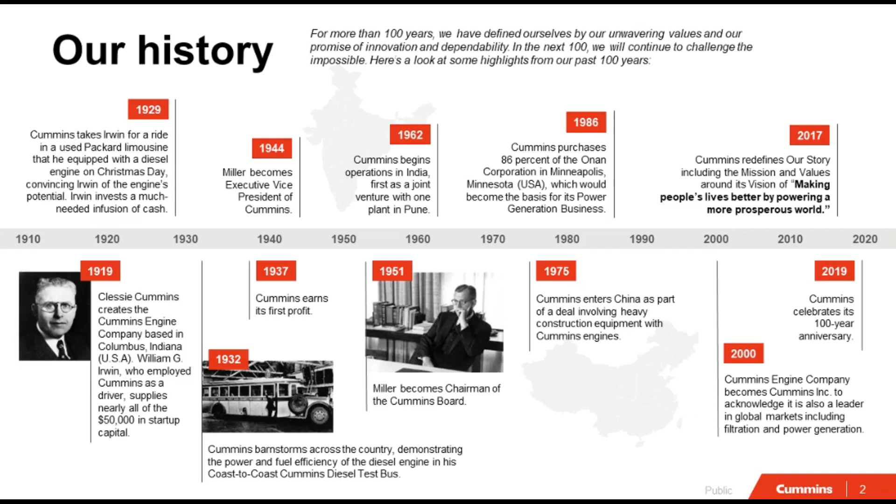We're on track to exceed this number in 2023 in terms of investment. There's a little bit of, I'll say, tension around that number in that some of our investors would say we would rather have the money in dividend, but we think this is the right investment for the future. We're really at a critical time in technology changes over the next 5 to 10 years. We want to be set up for the future, so we want to have that investment now so that we can offer those products in the future.

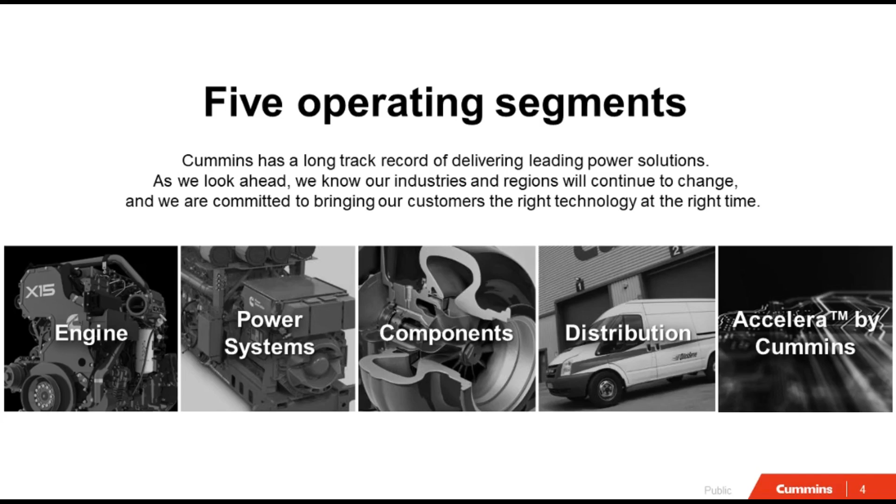All right, so Cummins is structured into 5 operating segments. So the traditional business, which is our engine business, power systems. These are backup generators, locomotives, prime power, those kinds of things. And just to give you a sense of the range that Cummins covers, the smallest engine that we build is 2.8 liters, the largest engine we build is 95 liters, and everything in between. For transportation related, it's 6.7 liter to 15 liter. That's the range that we cover, but Cummins covers a lot of power applications that may not be obvious at the surface.

We also have a components business, so turbochargers. We acquired some brake applications, so we're now at vehicle component level, and Cummins is in this interesting space where not only are we selling power products on our own, branded as Cummins, we're also selling components to our competitors. So you could see a Cummins turbocharger on a Caterpillar engine, which feels a little bit weird sometimes, but we cover all that. And then our distribution business, which is basically service and support.

And then Tim touched on our Accelera business, which is really our electrified product platforms. It used to be called New Power within Cummins. That seemed like a not very creative name in my opinion, so we rebranded it 6-8 months ago now. So if you hear about Accelera products, it's Cummins. It's not a standalone, it's actually within the core business.

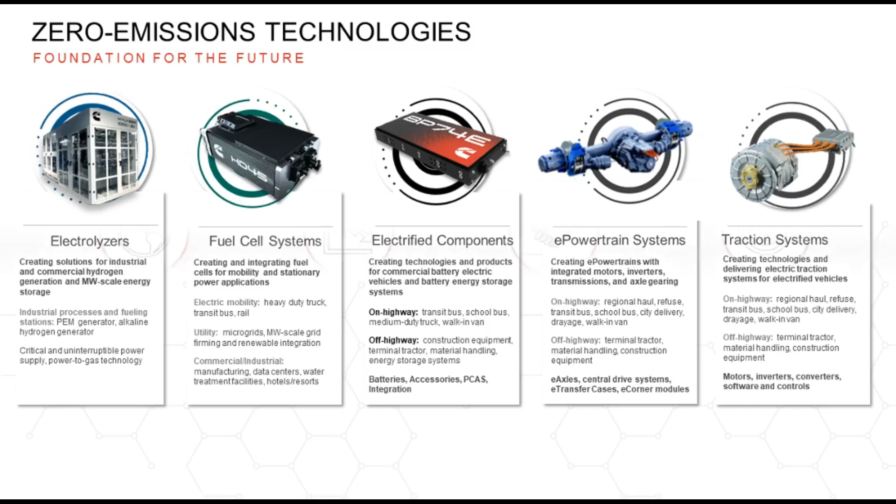Internally we talk about this journey as our Destination Zero. And that doesn't necessarily mean that we're going to move everything to zero emissions. It means that we're going to look at how do we lower emissions today.

One example of that is if we can make a 1% improvement in fuel economy on our diesel product, and we sell 100,000 of those in a year, that adds up to be a really big number, right? So there's power in scale.

We also look at what are the options to reduce well to wheel. I didn't get to hear everything this morning, but when I came in there was some discussion about CARB and the rules and how they're looking at things. And they're only looking at tank to wheel, right — the fuel tank, or the tank to tailpipe, really.

And we think that's not really the right way to look at it. We think there are fuels out there, especially if you're looking at carbon, where you can reduce your carbon impact substantially by incorporating renewable diesel or renewable natural gas or those other renewables that are getting generated, especially on the natural gas side, through normal life processes. You're going to get natural gas off of landfills, off of wastewater treatment — all these things are going to make natural gas. Why not use those for productive purposes in transportation?

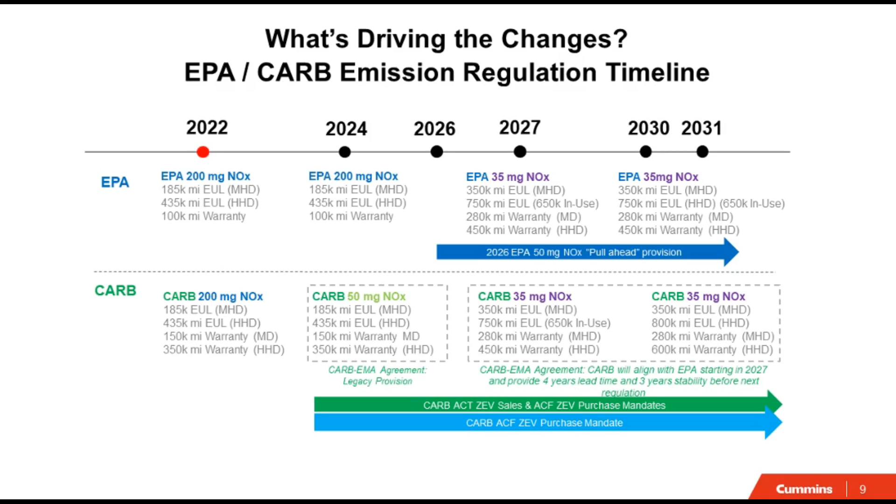There's also the Advanced Clean Truck Rule, which requires sellers of heavy-duty equipment to sell a certain percentage of electric. And on the fleet side, there's the Advanced Clean Fleet, which requires a certain percentage of purchases to be electric starting in 2024. And if that wasn't enough, we've also got the Clean Truck Check Program, basically a smog check for trucks, that starts next year.

So there's a lot going on, and a lot of these crossover. Omnibus impacts what we as powertrain providers can offer to the market. Advanced Clean Truck Rule impacts how many combustion products we can offer. And if there aren't enough electric sold, they can't sell enough combustion. Folks that are trying to get goods and services moved get pretty upset pretty quickly.

So I'll give you some side advice: as much as it feels like CARB doesn't listen, keep bringing those real issues to them, because eventually they'll have to deal with the reality that you guys are facing. And I know it's painful. I know it's painful.

Here's how we think about adopting new technology. First and foremost, can the technology get the job done that you need? If it doesn't serve the need, or you have to have 2 or 3 vehicles to do the same job, that doesn't make sense. So at Cummins we're trying to provide solutions where the technology makes sense for your operation, versus force-fitting technology we want to sell. We figure if we offer it all, we don't care which one you choose, as long as the powertrain's painted red. Does it make sense economically?

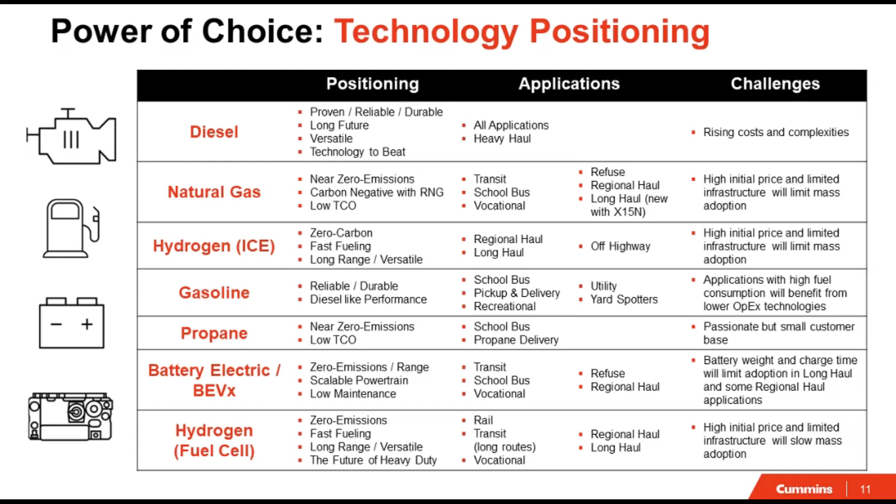At Cummins, we still think diesel engines have got life left in them, and we're investing in bringing the next generation diesel engine. I've got a really cool graphic and a couple of slides I'll show you. We call it our fuel agnostic platform. It'll be fueled by diesel, natural gas, hydrogen, gasoline, or propane - not interchangeably, the engines are slightly different, but the base platform is the same. That's how we're going to bring to market a lower cost, by having the same base platform and making the adjustments to components necessary for the fuel.

We're also invested in battery electric. The electric transit bus has our powertrain in it, the Blue Bird school bus has our powertrain in it. BEVX, which I think is a horrible acronym, internally we call it BEVX - it's hybrids, pick your fuel for the engine part, but it's a hybrid technology. And then fuel cells - we're engaged in fuel cell development, we have trucks deployed and we're learning every day. We think there's a lot of synergy between making fuel cells successful and introducing hydrogen combustion early, because if we can get the volume of fuel up, we think the price can come down significantly.

Is anybody running hydrogen today? No? So hydrogen right now is roughly 25 bucks a kilogram. Back to that TCO, that doesn't make sense. So we're thinking, how do you get that up - or I mean, to get the price down, you've got to get the volume up. You've got to get those fueling stations running and reliable for it to make sense.

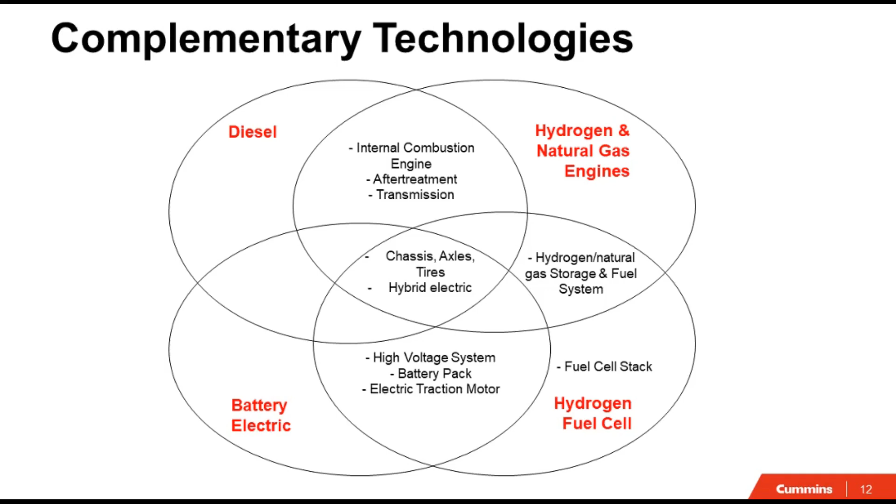You can replace the fuels, but that's where the hybrid technology comes in. So all of these really are complementary and not competing against each other. And we get into this debate about, well, who's going to win?

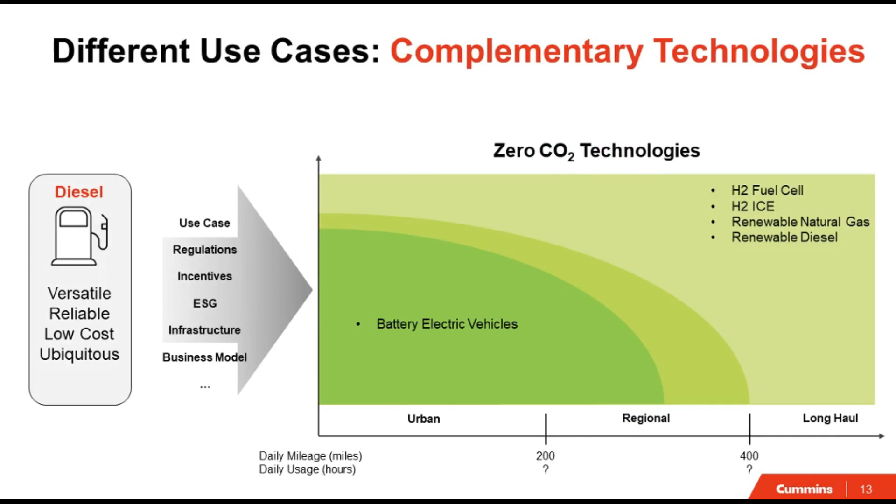We don't see it as which one's going to win. It's which one is the right one for your application. That's how we think about it.

And that application is probably influenced by a number of things, right? Regulations and incentives. Some companies and agencies have environmental sustainability goals. Can you get the infrastructure? Does your business model support it? So all of these things are going to play into it. The batteries make sense, the fuel cells make sense, the hydrogen ICE makes sense, natural gas, renewable diesel, right? It's all in the mix here.

And it's likely you're going to see this mix even within fleets. The different applications will make sense for different technologies.

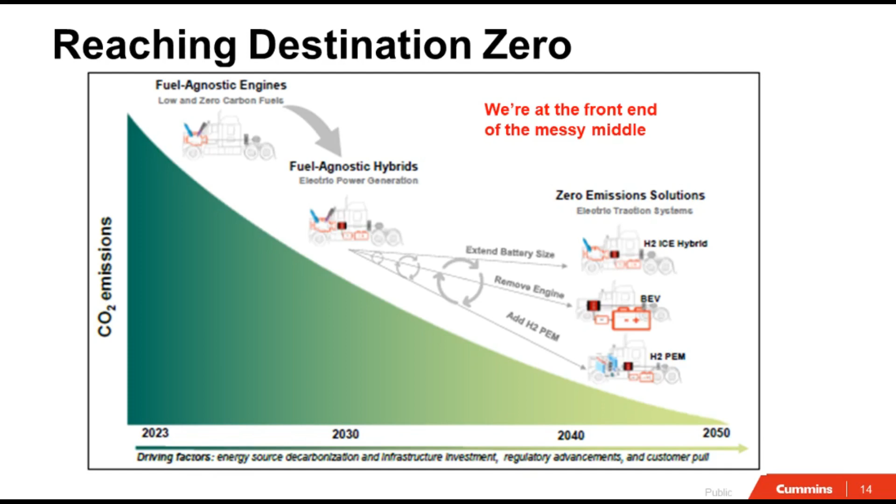So we look at it as we're on the front end of this curve, which we call the messy middle. We have no vision that this is going to be this nice, gradual, sloping curve. It's going to be all over the map, and it's going to depend on a lot of different factors. But with the goal to get to the lowest emission technologies, sort of in the 2050 timeframe. And it's going to be this combination of stuff.

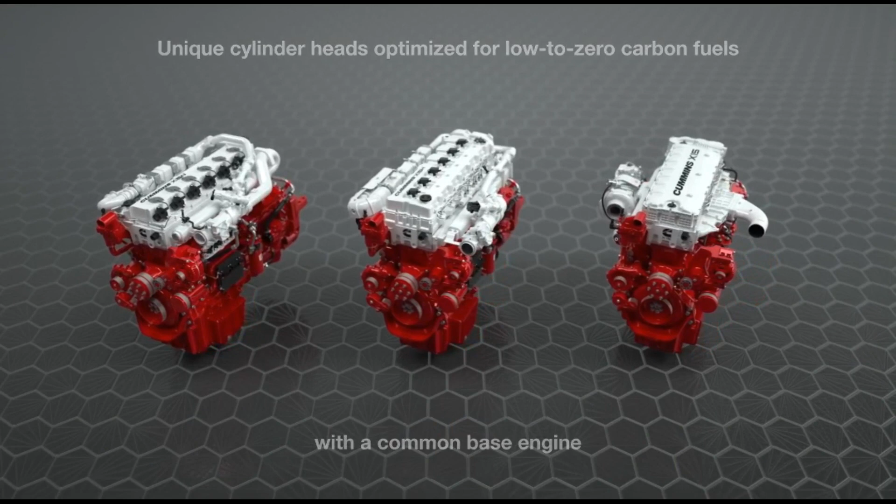Okay, so this is a super cool video for fuel agnostic. The white part of the engine is the part associated with a particular fuel, and the red part is the base product. That same engine, whether it's hydrogen, natural gas, or diesel, will sit basically in the same place.

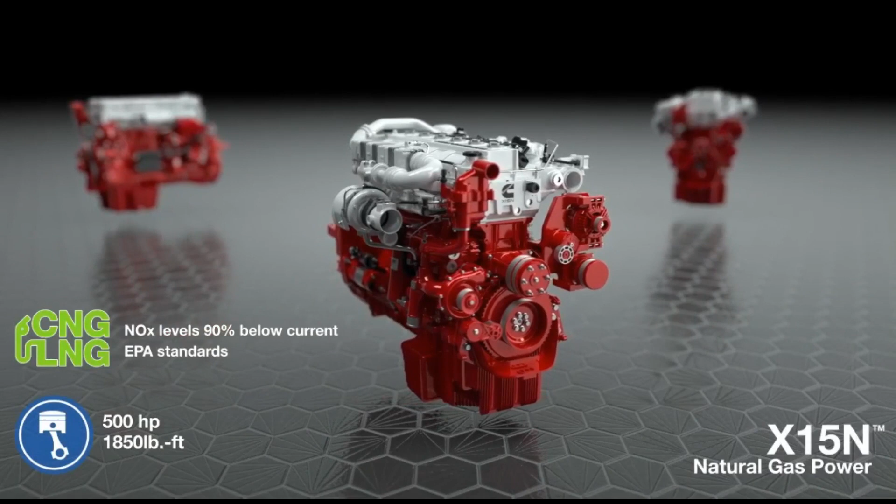Those folks that are designing trucks, integrating products, really like this concept. They don't have to know more about each type of fuel. That's a big part. It's not totally seamless in the sense that it drops in one to one, but it goes a really long way.

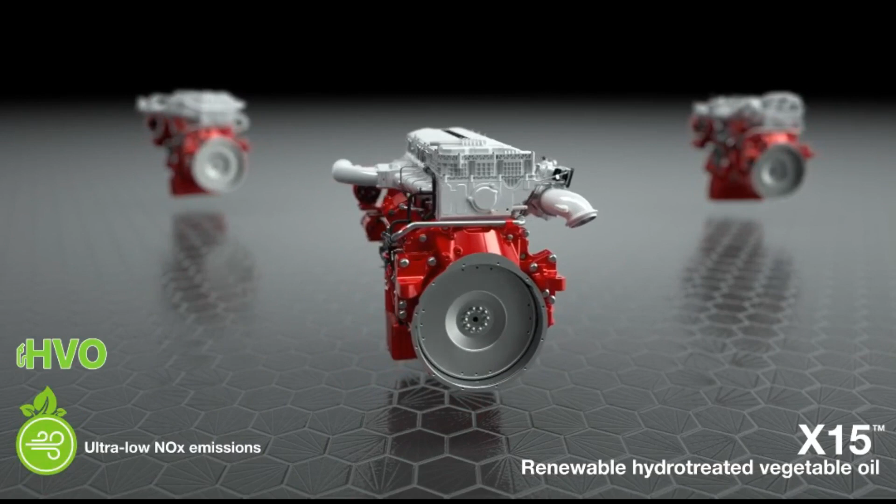Questions, and I will give you one of three answers. I will tell you what I know. I will tell you that I know, but I can't tell you. Or I will tell you I don't know. So, who wants to go?

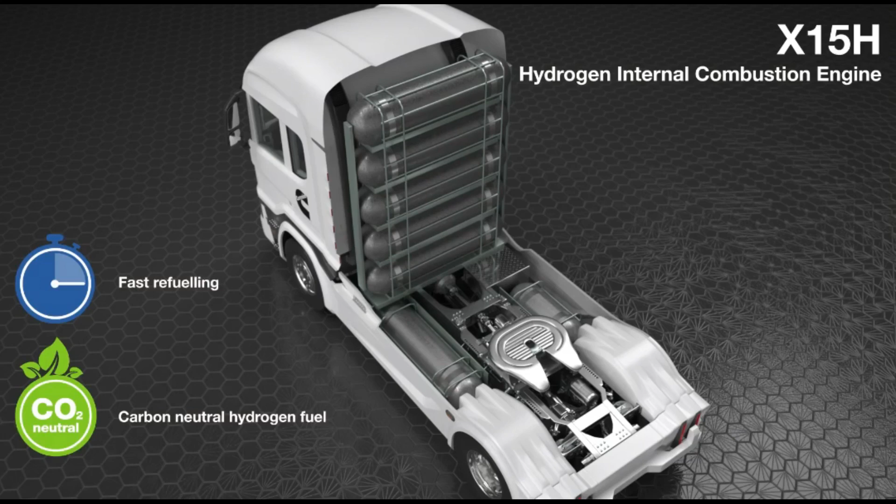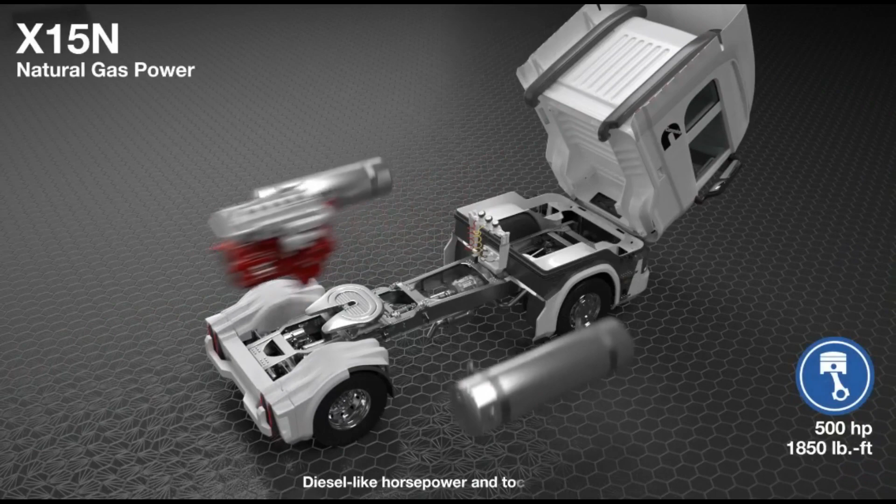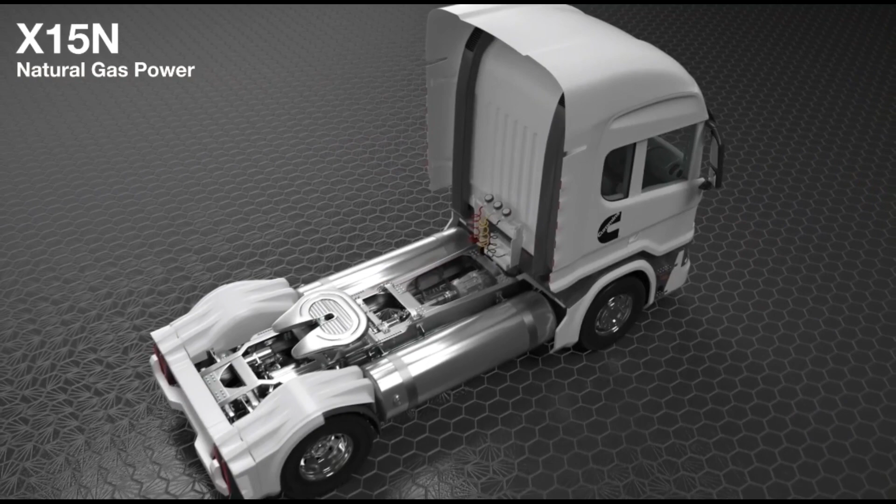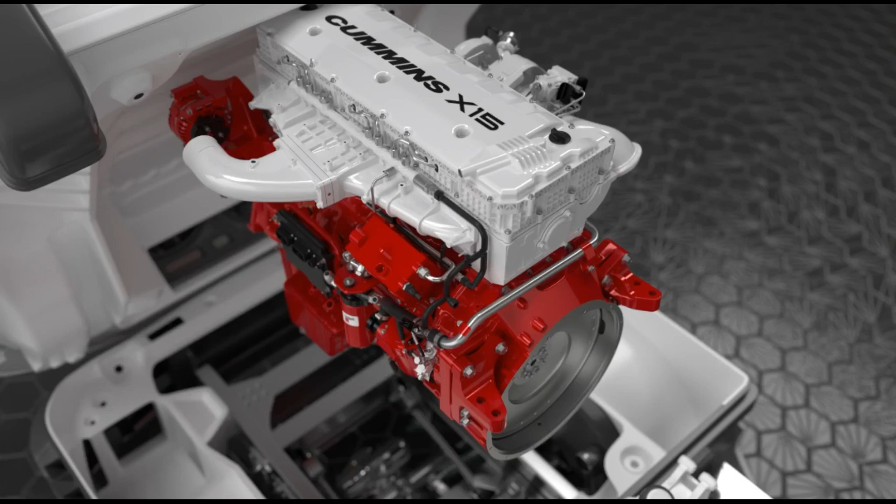So in the steady state, selective catalytic reduction - we're going to inject urea, so it'll look very much like a diesel after-treatment. But it doesn't need to be nearly as big because the NOx is already pretty low.

So we don't know, this is a long way to say, Tim, we don't know yet. We're actually running tests right now. There's a test engine at Southwest Research. We're hoping to have those preliminary numbers early next year.

Yes? And they ran efficiency tests at Cummins between the fuel cell efficiency and the efficiency of the hydrogen. So the efficiency difference between hydrogen ICE and fuel cell?

Yes, but I don't know the direct comparison. Combustion is always going to be less efficient, just in general, right? The conversion rate isn't as good. So we're not suggesting that this is necessarily a one-for-one for fuel cell. It gets hydrogen going, and there may be applications where it's a long-term solution, but we think it really enables hydrogen in the nearer term.